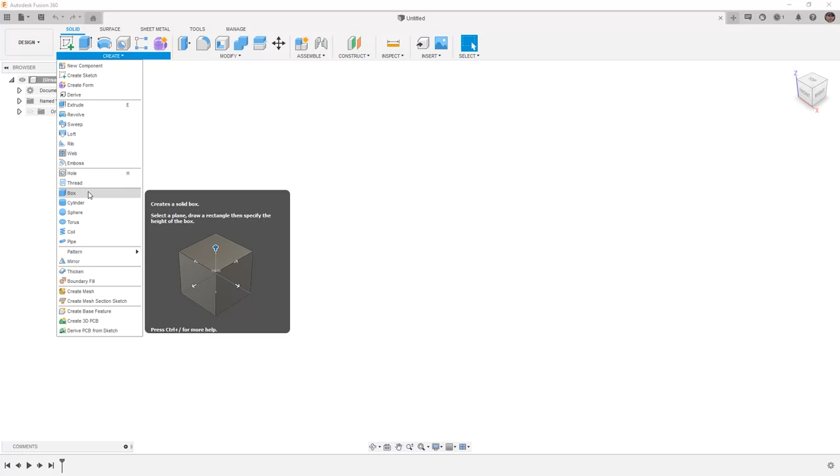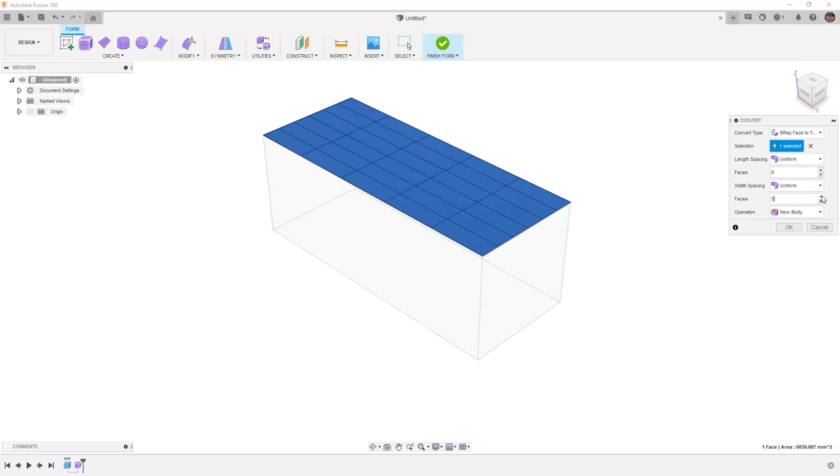a box primitive. We're going to start by going to Create, selecting Box, picking a plane, and simply making a rectangular extrusion. From here, we're going to use Create Form, and we want to use Utilities and Convert to convert one of the faces from our BREP body. In the Faces Division section, we're going to increase these each to 6 with uniform division and say OK.

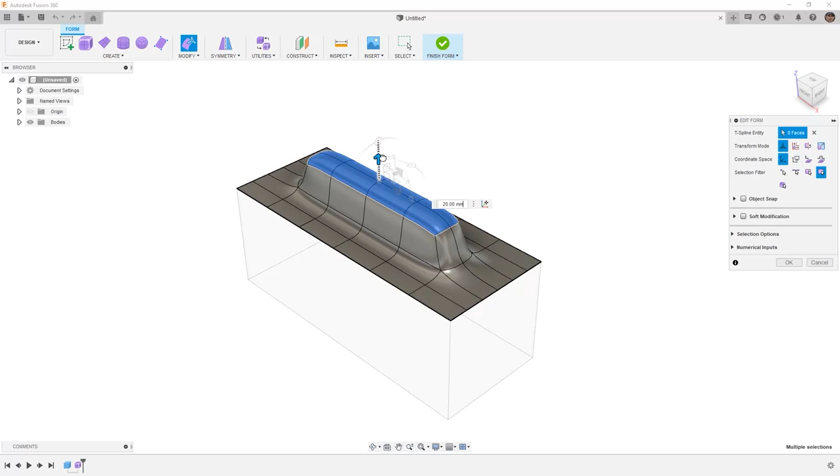What we'd like to do is make some modifications to the top of this design. I'm going to begin by selecting a group of faces on the top of the design in the center. I'm going to go to Modify, Edit Form. One thing that we can do with Edit Form is we can hold down the Alt key on the keyboard, and as we begin to transform, we'll create an extrusion off of that face.

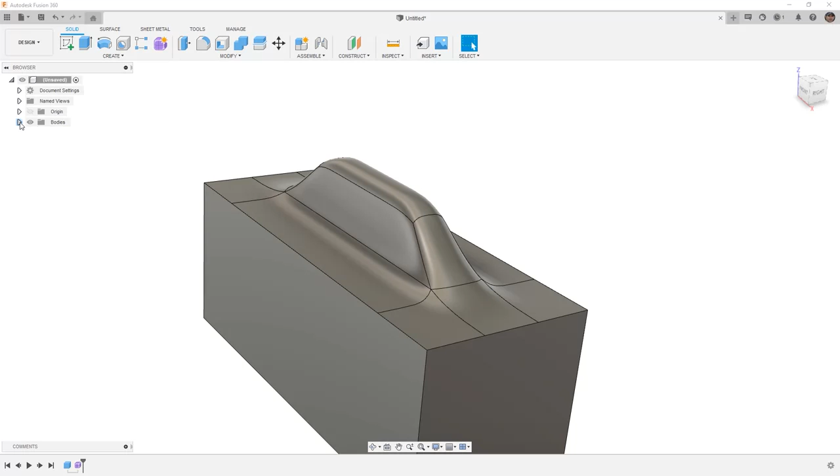Then we can use our other manipulation tools to scale them down and make adjustments to them as needed. In this example, we're going to scale it down just a little bit, making this rise in the center of the face. From here, we're going to finish form and take a look at our bodies folder, noting that we have body 1, which is a solid, and body 2 that's a surface.

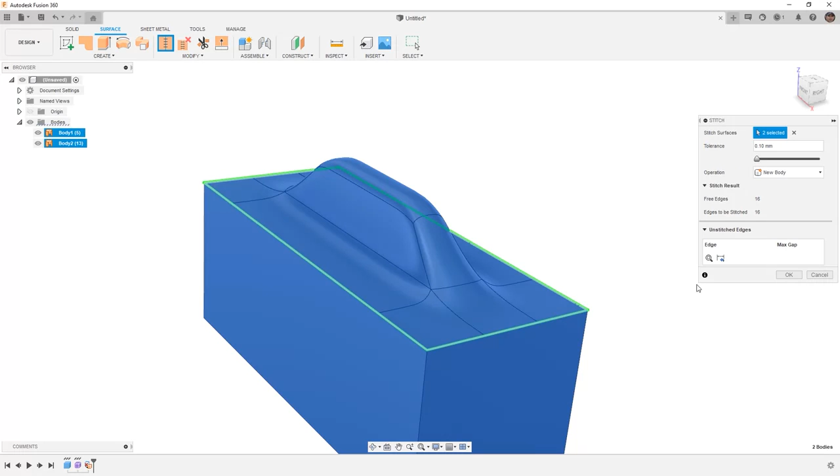Let's hide body 2, navigate to our surface tools, select the upper face, and go to Modify and Delete or hit Delete on the keyboard. Then we can take Stitch and stitch the formed surface and the original body with the removed top and say OK. This will turn it back into a solid body.

This allows us to take the Convert option, convert parametric BREP faces, and then make modifications to them using form tools. There are some instances where it makes sense to convert a single face and make adjustments just to that face, while at other times it makes more sense to create a complete form body and then convert it back to a solid or a surface.

This is a basic example, but this functionality can work across multiple complex examples, and you can also use options such as Modify and Replace Face to include the modified form face back to the original BREP body. From here, let's go ahead and save this design as Convert.